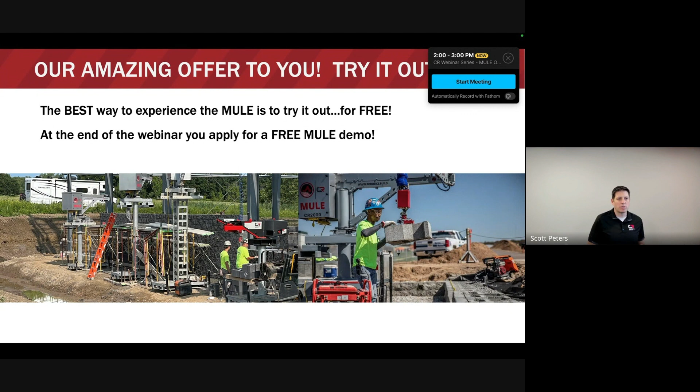So just to start high level about construction robotics and our core technology, it's really all about impacting some of the biggest challenges that you guys have out there in the construction world today, right? Labor shortages, we constantly hear about this, finding good labor, retaining good labor, it's always a challenge. Health and safety is definitely a problem. Injuries are very expensive and can continue to be a problem. And productivity, right? I think the industry trends speak for themselves.

Productivity isn't what it once was. You talk to people that have been in the industry for a lot of years, they'll tell you that productivity isn't what it used to be, and there's a lot of different reasons that are driving that. But at the end of the day, these are some of the biggest pain points that we continually hear from contractors out there. And one of the greatest things about the technology that the MULE brings to the table is that we can impact all of those. We impact the labor shortage, we impact health and safety, we impact productivity in a positive way for your business.

And it takes time to learn, it takes time to adopt, it takes time to really see the true fruits of those benefits. But we'll cover a lot of that today on how to accelerate that process and that learning curve.

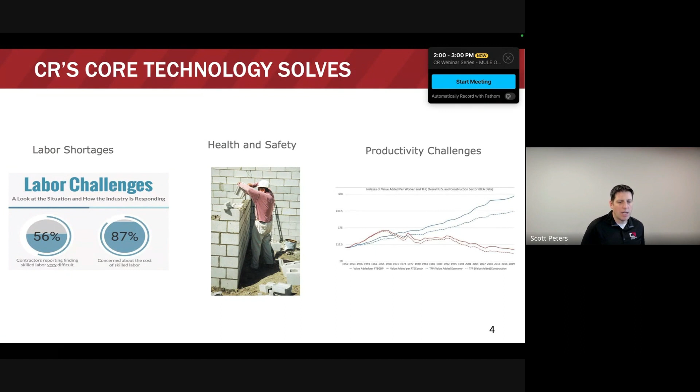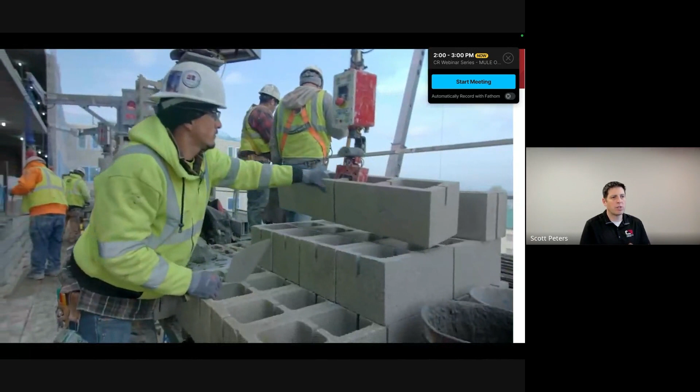So let's start with a quick video for those who haven't seen the MULE in action. We've got a ton of content on YouTube, a ton of different pictures and videos on our website, but this is the core of what the MULE is all about.

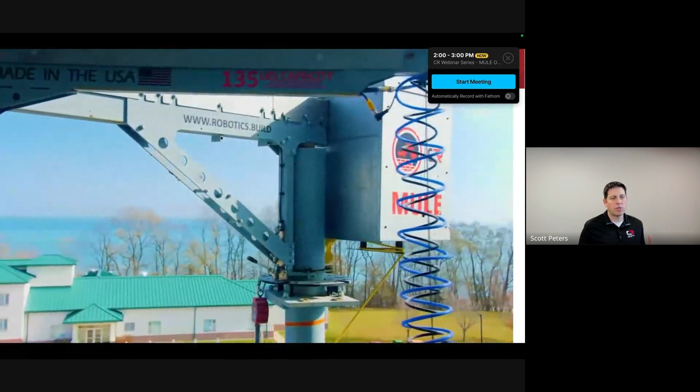We can make up to 150 pounds with the ML150, 100 pounds with the MZ100 weightless. So there's an 80-pound, 32-inch long block, and it just floats into place. So when you pick it, it floats. You can reach out, grab that material, zero strain on your body, your back and your shoulders.

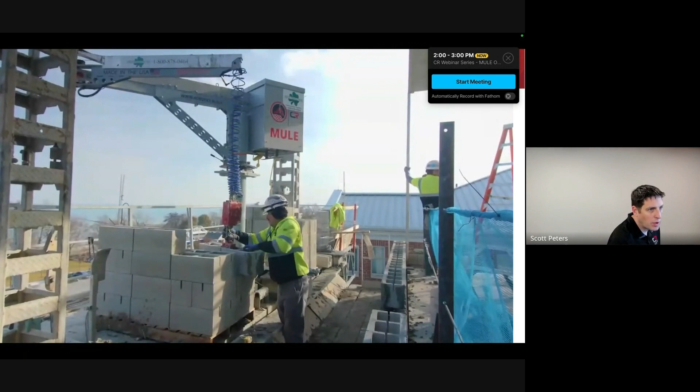So MULE stands for Material Unit Lift Enhancer, and it is a smart lift assist technology. It can make heavy objects feel weightless while allowing the worker to work directly with the material. We primarily lift masonry material today, but we can lift anything. So we can make any construction material feel weightless.

But again, primarily today it's block, brick. A lot of our off-the-shelf grippers are focused in that masonry industry, but we're lifting more and more products, and we'll talk about that in the gripper section.

Cranes and telehandlers and all sorts of things, lifting heavy materials. And now there's exoskeletons. There's a lot of great products out there to supplement back and body injuries and handle soft tissue injuries, things like that. But there's what we consider a little bit of a gap, and that's really, call it between 30 pounds and eventually 1,000.

Today we get up close to that 200-pound range, eventually higher. But in that range, these are things that when you're lifting them multiple times every day, you're creating injuries, you're creating problems. And the Mule makes that weightless.

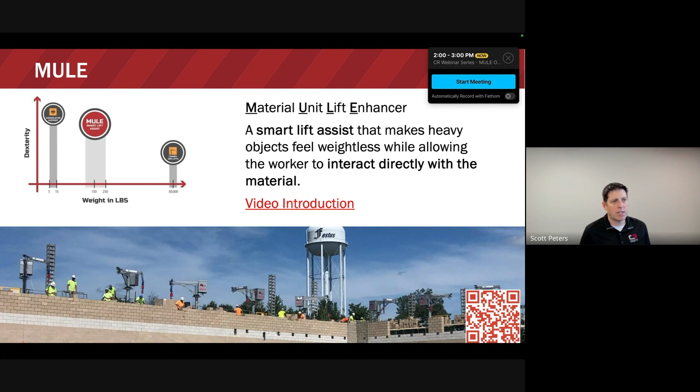It makes that process weightless, potentially takes a 2-man operation and makes it a 1-man operation, makes that material feel weightless. And so that's really the sweet spot of where the Mule technology, the smart lifting technology, fits with both our products today and more to come in the future.

I'll talk about some of the features of that product. And then we have the MZ100, and that's a product that launched just back in January. We've got quite a few of them out in the field, and getting super positive response as well. So really excited to have both products available, and we'll expand more on the different benefits, pros and cons of each of these products if you're evaluating which one might be the right fit for you.

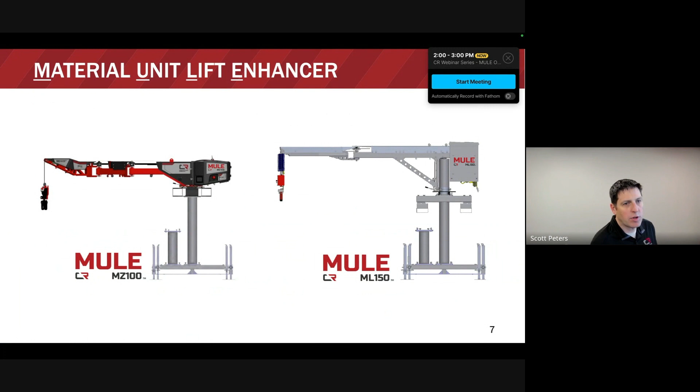So just really comparing the two, if you look at the left-hand side, the ML150 is really optimally used in outdoor applications. If you're lifting heavy materials, you're doing stone veneers, you're building block walls off the ground, off scaffold. I'll talk about different mobility setups, but if you don't have any overhead restrictions, that ML150 is a tried and true proven product, really excellent results with it. And one of the other really added benefits is flexible grippers.

So we have a higher lift capacity of 150 pounds with it, expandable up to about 180, 190 pounds with special software and special application analysis. We have off-the-shelf grippers, quite a few off-the-shelf grippers with that, you'll see that in one of the upcoming slides. And we can do custom grippers. They're also available, and even get into vacuum grippers.

So there's an air compressor on board with the ML150. It's a 110 plug, so it plugs into a generator, running off an inverter generator. That allows you to have access to pneumatic grippers, vacuum grippers, things like that.

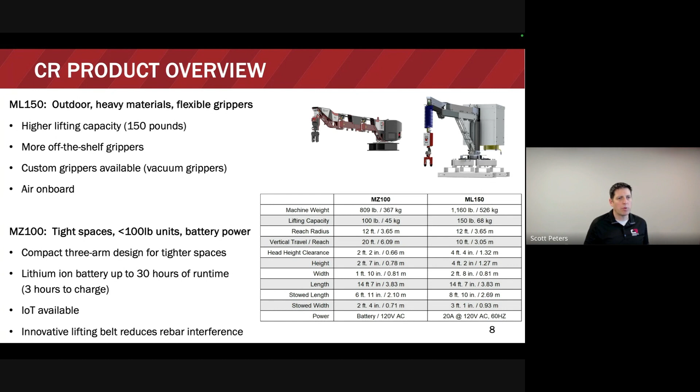One of the new pieces of technology integrated in this MZ100 is that we get real-time data on it. It's an option that's available on mules that you can opt up for. Then we have this innovative lifting belt, which reduces some of the rebar interference. On the ML150, we've got our air coil cord and data coil cord that come down to the controller. On the MZ100, we don't have that. We've eliminated that, which allows you to work in some of the tight rebar situations a little bit easier without interfering with those cables.

All right, so we'll spend a few minutes here talking about why the Mule, essentially getting into the ROI, the value, what this can do for your business, what this can do for your workforce. The benefits of smart lifting technology as a whole, we'll hit on 4 key areas. You've got workforce, which helps with labor challenges, extending careers and attracting new talent.

We spend a lot of time training the next generation workforce, going to different events, showing off the Mule, showing next generation workers that there are new technologies coming into the trade to hopefully help expand the pool of masons that are the future workforce. So it's not just the ex-linebackers out there, the big strong guys putting block in the wall, but it really opens up that workforce quite a bit, and that's been a huge win.

From an ergonomic standpoint, we eliminate the fatigue, the wear and tear, the injuries associated with repetitive heavy lifting. Masonry is a tough industry. It takes a toll on your body every day that you're out there lifting heavy materials day in and day out, and presents risk for injury. The ergonomics of the Mule obviously eliminates that.

And we've seen huge gains, huge benefits. I can tell you a lot of stories, but some of the most exciting stories for me personally are when we walk on a job site and talk to actual masons who have come up to us, shaken our hand, and thanked us, so appreciative of the technology. They wish they had it 20 years ago, but a lot of them talk about how they've been able to come out of retirement. They haven't laid block in quite a few years because they've been injured and could only be on brick jobs. When we hear those stories about people able to use their skill, the craftsmanship they've developed over the years to still have an impact in the industry, it's really exciting for us.

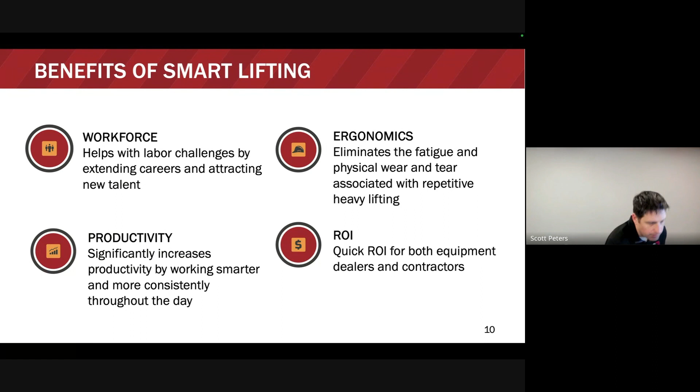So the other piece of value, there's kind of two sides of the value coin we'll touch on here. One is the hard costs—the things that can directly impact the bottom line on a project. Then you've got the soft costs, things that ultimately do cost you money, but you don't see them directly on a specific project. So the things that are hard costs that we directly impact...

The meat of the value you're going to get out of the Mule is really increased productivity. So we've seen productivity increases ranging from 20% up to—we've got a contractor doing over 300% increase in productivity. And it's not everybody, and it's not out of the gate. It takes a while to get to that level, but we will say it's possible.

So this equipment can absolutely pay for itself in relatively short order if you apply it in the right way. And a lot of what we talk about is how to do that.

Lower labor costs per block installed, the ability to install oversized materials. We'll touch on 32-inch block today and what a game changer that can be for you.

Schedule reduction, right? If you can put the same crew out there and reduce your schedule, or put a smaller crew out there and keep the same schedule, those are the types of things that will help you bid a project, utilize the Mule and the Mule method to actually save money on that project and get it done more efficiently, faster, or bid it more competitively.

And then reducing lightweight block budget, right? A lot of contractors we talk to pay a premium for lightweight block, and there are benefits to that because of the increased productivity and the impact on their body, the health and safety.

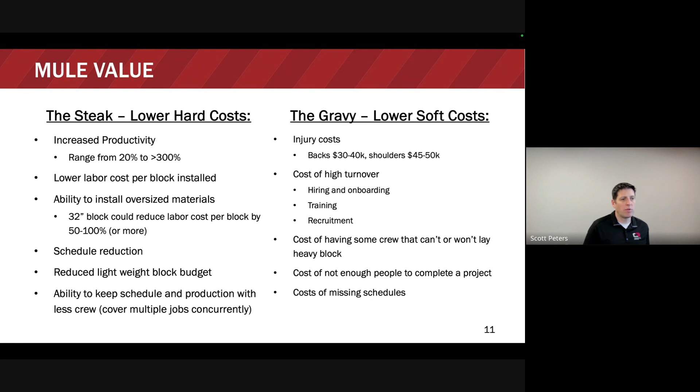And then the cost of just not enough people to compete or complete a project, or really missing schedules, right? Those costs are very real and impactful. So to prevent those, the Mule can help with all that.

So we're going to get into ROI for a couple minutes here and talk about it. We actually have a calculator online available if you're interested in doing an ROI analysis. If you go to our website, construction-robotics.com, under resources there's a drop down with an ROI spot. You can go to that website and play with the calculator. We'll be continuing to improve this, so we welcome feedback on it as time goes on.

If you look at just a 30% productivity gain on a job site—and obviously labor rates and productivity vary based on market—but as an example, if you have a labor cost per block of $5.76 with a 3 mason to 3 tender ratio, and you increase productivity 30%, there are really two factors that save costs: increased productivity from the health and safety impact and the ability to work continuously throughout longer days, and the ability to relook at your mason to tender ratio so you can pick block straight off the pallet, reducing double handling and freeing tenders for other work.

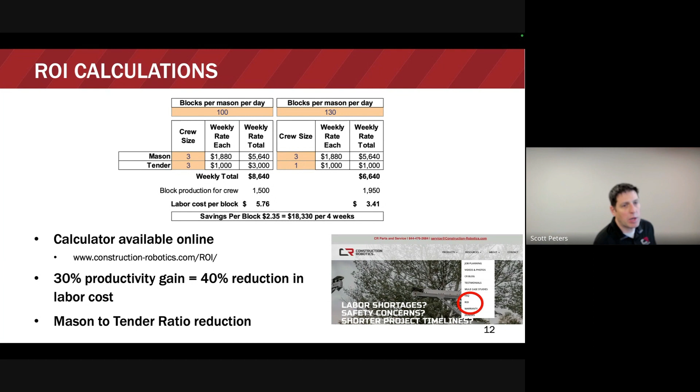When you reduce that double handling, it has a direct cost impact on your job. Savings in this case can be pretty significant over a 4-week period—you're improving your savings per block by about 40%. So the mason to tender ratio can have an impact, and productivity has a huge impact. We encourage you to play with the calculator and give us feedback.

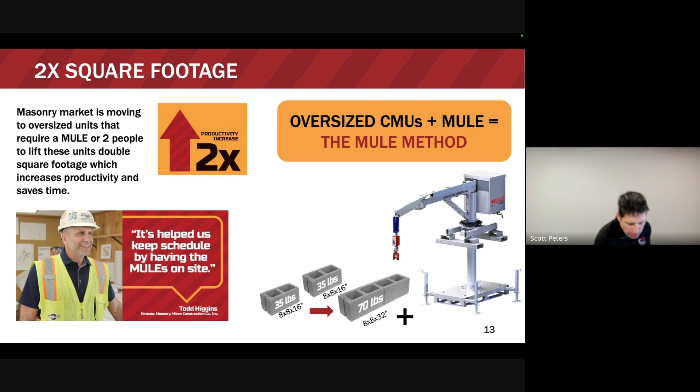The other piece of ROI that's really interesting is this 32-inch block story. Your standard 8/8/16s are prevalent—you probably lay a ton every day. But in many markets, and more are coming online every few months, 32-inch block is available. The idea of a double-long block is a game changer: you double your productivity with every motion to the wall. When you couple oversized CMU with the Mule, you get the Mule method, which, as Todd from Miron will talk about, helps with schedule, productivity, and across the board.

32-inch block is available in quite a few markets, with more coming online soon. We've seen great success in many markets, and this is a way for masonry to continue to compete, win back wall share, and grow as an industry. Once smart lifting tools are more prevalent on job sites, we need to ask what other ways we can optimize material designs and job sites to improve efficiency and productivity. It's exciting to see the continued support and collaboration with block manufacturers around the country embracing 8x32s, 10x32s, 12x32s, and other oversized materials.

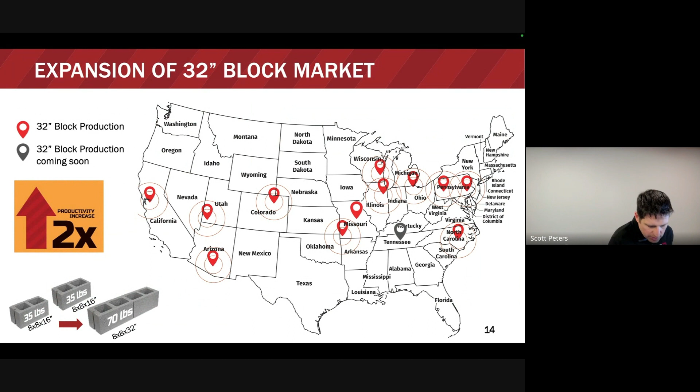When you look at the ROI of doubling your square footage with each motion of the wall, the ROI of 32s is fairly obvious, but let's walk through the basics. If you had 100 8/8/16s, you'd put 89 square feet in the wall a day; with 100 8/8/32s, you're putting 178 square feet in the wall in a day. Your labor cost goes from roughly $5.76 per block down to $2.21—cutting labor costs more than half. That equates to about $40,000 over a 4-week period of laying 32-inch CMU.

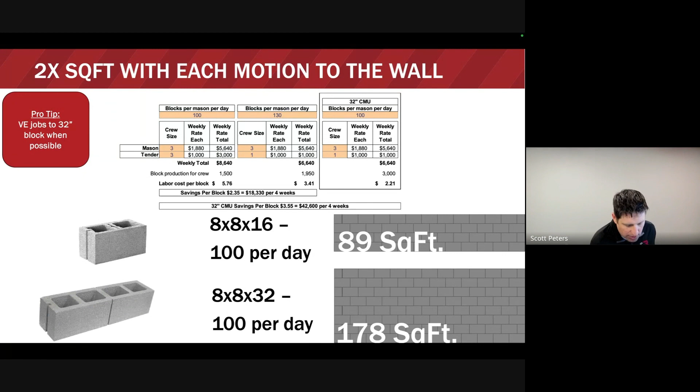We've seen a lot of jobs that get value-engineered to 32-inch block. It's great if an architect can specify it from the beginning—there's a beautiful long aspect ratio, and if you remove the score, there are some beautiful 32-inch block buildings. With the score, it can also be integrated with 16-inch block, no problem. We've seen many projects converted to 32-inch block well after design completion, going in with a change order to get it approved. We're happy to help facilitate or connect you with the right people to learn from that process.

All right, materials and grippers—we're going to run through a whole bunch of pictures and applications on the nuts and bolts of the Mule.

And then we'll talk about some of the learnings and how to be successful in getting going with the Mule, and what the next steps look like.

From a gripper standpoint, you have the ML150, a whole versatile range of grippers. We have a standard CMU gripper, and we have a modular gripper. The modular gripper works great for materials from really narrow, as narrow as an eighth of an inch, up to 18 inches long. If we needed to go bigger, it's very possible we could. So when you start picking different masonry materials, that modular gripper is incredibly flexible. We've got a whole huge library of materials sent from around the country, and we can pick basically all of them with the modular gripper in some fashion. So I challenge you, if you ever have material you think we can't pick, send it to us. We'll find a way to pick it.

And then the veneer gripper, our standard modular veneer gripper, is also available. Similar components to the modular gripper. The big difference is that we have a rubber pad on the cam on the front, and a finger on the back side that allows you to fit into a 1-inch cavity. Really nice, flexible product there. And then we have a hook that's pretty standard. You can just put the hook on there, put a sling, whatever you need to grab with that, no problem. We've even seen a vacuum gripper put on the bottom, battery powered, connected to the hook.

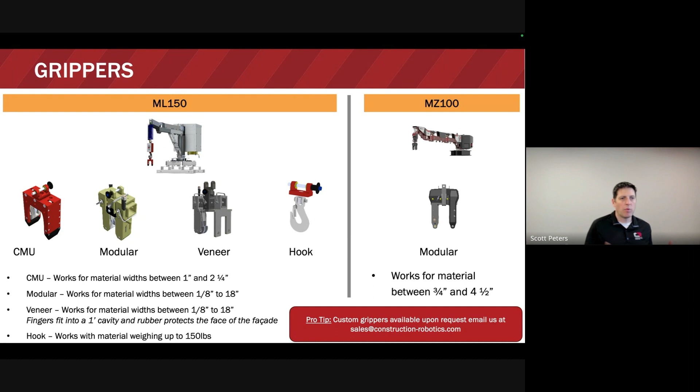The MZ100 was launched with a smaller modular gripper. It works for material between 3/4 of an inch and up to 4.5 inches. It can pick a veneer stone, though it doesn't have a veneer finger yet at this time, so you need enough cavity on the backside to pick that veneer stone, but in general it will work for that. And the pro tip here is that custom grippers are available upon request. Please reach out to us at sales@construction-robotics.com, submit through our website, and we can help you come up with a solution for picking whatever material you want.

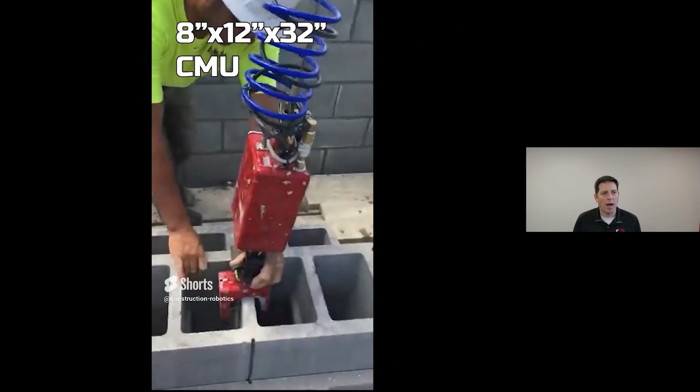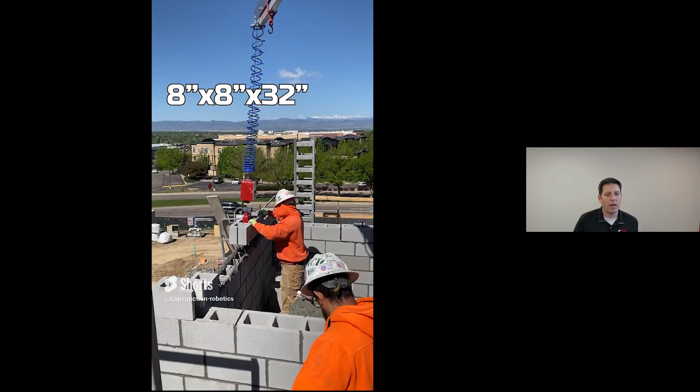So here's a great video showing all the different materials that we can pick with these different gripper options, whether it's a 1232, a 70-pound sound wall block, your bond beam blocks. There's really almost no materials that we can't pick with the grippers we have available, or even these custom grippers we talked about. So a lot of different versatile options.

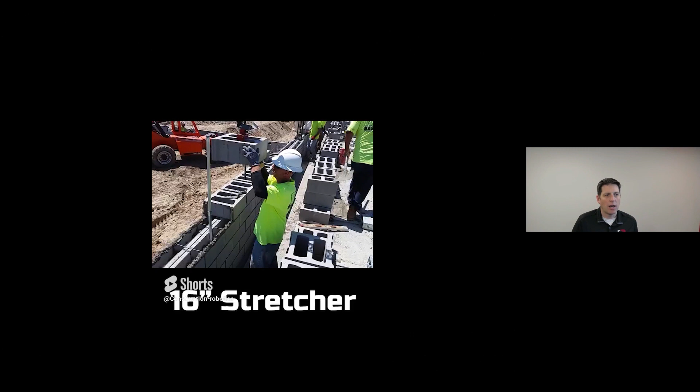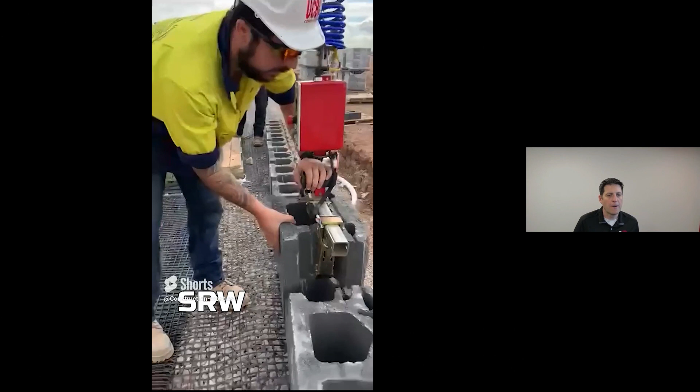There you go, coming up over rebar. We've got things like rebar extensions where needed, when you're laying those big 16-inch blocks, in these heavy rebar situations, and even SRWs. Great application for utilizing the Mule, with a modular gripper right there with the ML150, or even veneer stone. We've got some veneer stone grippers as well. So a lot of different gripper options. You can see more videos online and check out all of our accessories as well.

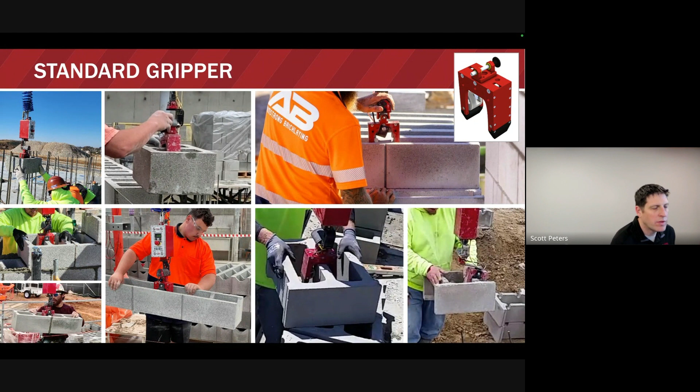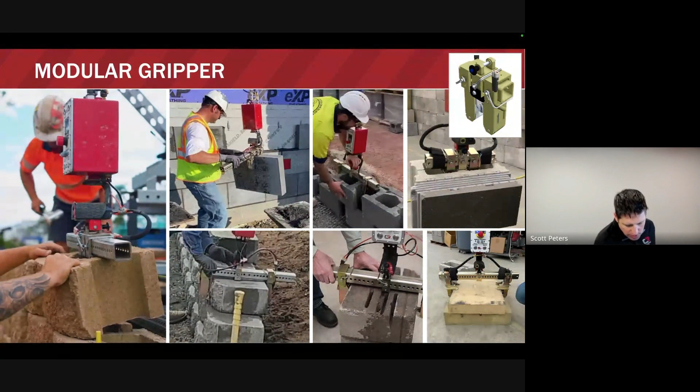Then the modular gripper, very flexible, adjustable to different widths. That modular gripper could be used to pick a veneer stone if needed, but also a lot of retaining wall, SRW block with weird webs, even large flat stones we've picked with that material. So again, very flexible, very versatile - it's a nice Swiss Army knife to have in the toolkit as you're picking different materials. And then the hook, shown on the left, and the veneer gripper on the right.

And the hook, you can see we've picked a lot of different things: pipes, cocoa bean bags, a lot of different materials. And on the right, you can see pictures of utilizing the veneer grippers to pick those stone panels.

When you go from a 2-man operation down to 1-man operation, it's incredible. One of the fun stories is a picture with a contractor talking about the material they're installing and just how much the mule helps them.

One of the interesting features they were highlighting was that as you go to the wall and try to fit that stone into place, if any adjustments are needed, you pull that stone back off the wall, make those tweaks and adjustments to tie it in, or shave off a little bit here and there to fit into a spot.

It was incredible to have that stone just float there—pull it off the wall a little bit, let it float in space while they made their adjustment, try it again, bring it back out, float, make the adjustments, try it again. That type of interaction without the mule is incredibly painful and time consuming. With the mule, it's super easy, super fast, and I think it's a game changer.

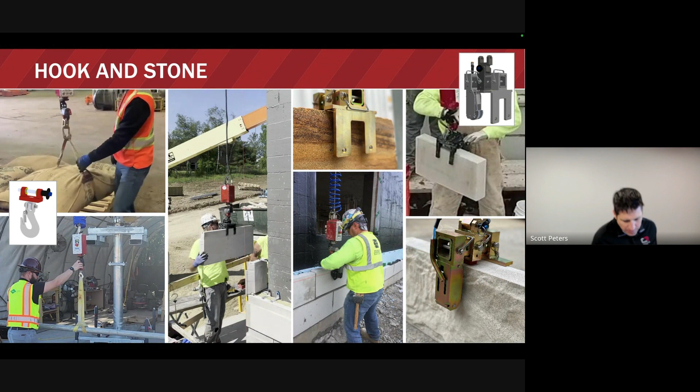All right, additional pictures of stone. We've got a great project going on right now up in Vermont. It's been featured in the news up there, with easy scaffold rail systems, mules, and installing these heavy 130-pound veneer stones. It's going great—the guys absolutely love it, and they're seeing phenomenal results there.

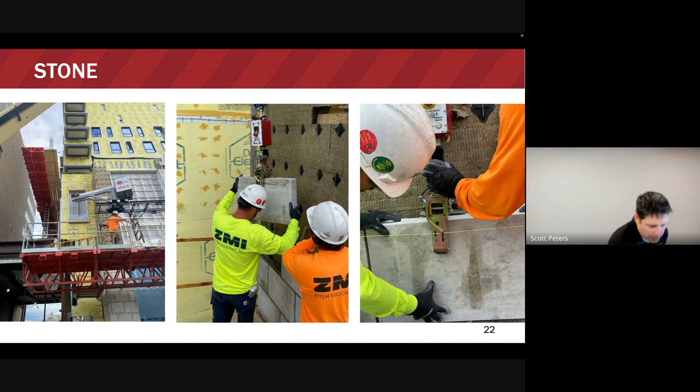All right, the bases—let's get into some of the bases here. One of the cool things about the two different mule products, the ML150 and the MZ100, is that we actually have universal bases across the board. I'll walk through each of these individually, but you've got your ground setups.

Up to 20 feet freestanding on our standard ground base that has 4 outriggers you can level up. You put masts on top of those outriggers. The masts come in 5-foot and 2.5-foot increments, and you can stack up to 20 feet of those on top of that ground base, with either the ML150 or the MZ100 mule on top.

We also reconfigure the fork pockets under the ML150 to be utilized for a mast climbing work platform deck attachment—you'll see more pictures of that next slide. We have a cart attachment, just a manual wheel cart that goes under the ground base. There are mast adapters available for certain mast climbing masts, so you can utilize those masts either to attach to the ground base or even to attach a mule to the top of the mast.

Scaffold has a rail system now available—we'll show you a few pictures of that. There's a TPX fork attachment; we partner with JLG, and there's a product now available that we sell and that can be available for rent, the TPX, or really the TF4000. That's a little stand-behind tracked forklift that we can actually operate the mule off of. You'll see a video of that at the end potentially.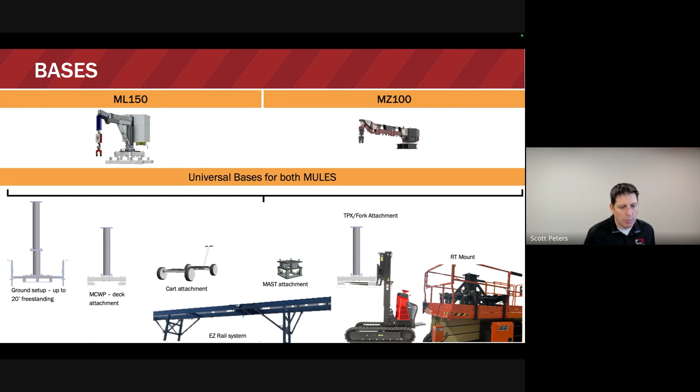And then we have an RT mount. We've recently been approved by JLG with their 3394 RT scissor lift, a rough terrain scissor lift that goes 33 feet in the air. They have actual mounts available for rent or purchase that can be mounted right to that RT. You can rent or buy those RTs and quickly extend in the air, operate your mule from the other side of the wall from your scaffold, lower it down, move it over in a matter of minutes, and get it reset up. So if you're using frame scaffolding or want to load your scaffold with materials and don't want the weight of the mule on those scaffoldings, up to that 33-foot mark, that RT becomes a very, very real, very viable mobile option we highly encourage you to take a look at.

All right, so ground setups. The basic ground setups—in the upper left, you've got some freestanding setups. The standard package that comes with a mule is 7.5 feet of mast and a ground base, and either the MZ or the ML arm. In that case, very easy to set up and operate off the ground. In the lower left, you can see a few different mast setups there.

They've got 7.5 feet of mast in one, 10 feet of mast in the other. They actually have a hydromobile mast adapter in another with 10 feet of mast, and then the MZ on a ground setup. So you can see lots of different flexible options as you look at the parts and pieces that are fairly interchangeable on job sites. And with freestanding, you can integrate it right into your frame and build the frames around it if needed.

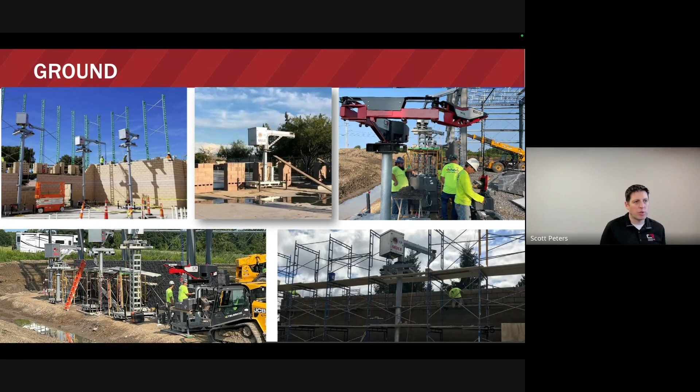With some of the ground setups, you can see some other applications there. Very easy to pick and move with a telehandler. Just pick it with the fork pockets up top, move it to where you want to go, set it down, level it up, and you're off to the races.

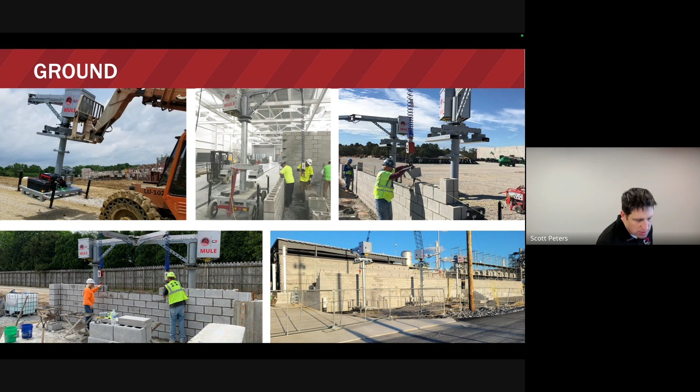We have a wheelbase, and we've also operated them on trailers. That wheelbase is great if you're interior on a concrete floor — you set up your mat, set up your wheelbase, and easily drag that mule around where you want, put your outriggers down, operate it, very quick and easy to just crank the outriggers up and slide it down. With the wheelbase, you are limited to a certain height — you can't go full 20 feet. We're working on the details of that, but if you have an application question, feel free to reach out to us. We can work through that with you.

We've had contractors that have even utilized the mule on trailers themselves — put your material on the trailer, put your mule on the trailer, put your material right on the trailer, and pull it down the wall. In the case where you're doing long site walls or SRW walls, or a long run, that mobility can be a huge advantage. That's a great way to look at doing those projects.

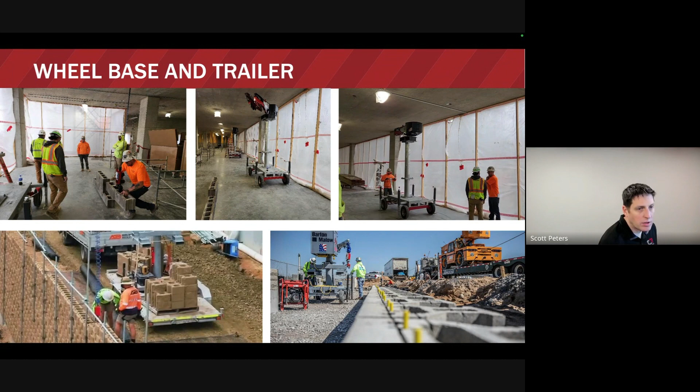All right, mast climbers. We mount to both the decks as well as the mast of most mast climbers, and we work with all the manufacturers out there. So reach out to us for more information — we're happy to collaborate with any mast climber manufacturer to find a solution that works best for you.

You can see in the center, a standard deck mount for us is to have the fork pockets on the ground. There's an adapter plate on top, and deck straps that clamp right into the fork pockets. You have a mast on top of the adapter plate, and then the mule, whether it's an MZ or ML. You can operate with 5 feet of mast, or 7.5 feet of mast — there's a few different options there.

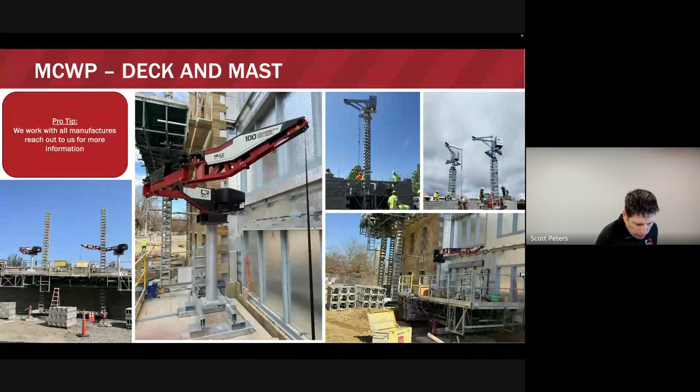We also can mount to the mast, and in the upper right-hand corner you can see a couple of mast mounting options. If you want to get the mules up high and out of your way, you can mount them to the top of the mast. There's some pros and cons to those setups. The best bet is to work with us to do a job analysis to figure out what makes the most sense. Certain applications it's great to use it on the mast; other applications can present challenges, and there's other ways we'd approach it. Definitely work with us, and we can help you come up with the best game plan.

I'll quickly run through a handful of examples of different mast climbers with mules. Here's some hydromobile pictures — when you put a mule up on a hydromobile, if it's deck mounted, you typically want to space them roughly 20 feet apart, so a mule every 20 feet. The arm itself is a 12-foot arm on either the MZ or the ML. With that 12-foot arm, you space it a little ways away from the wall, giving you about 20 feet of workable space per mule — great for the setup and workflow on that scaffold.

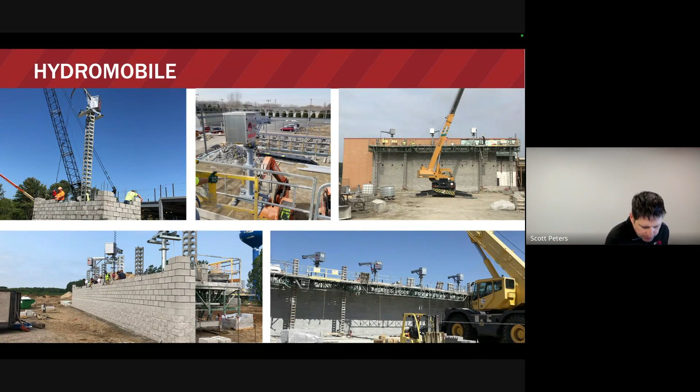Some more hydromobile pictures. Here's some great stair tower pictures where they're actually able to utilize the mules on the inside of the stair tower off of a mast climber, and then wrap the outside of the stair tower to load men and materials. A whole bunch of advantages with that method, but there's a lot of pros and cons, and we'll probably do a separate webinar with information on how to effectively operate on stair towers as well.

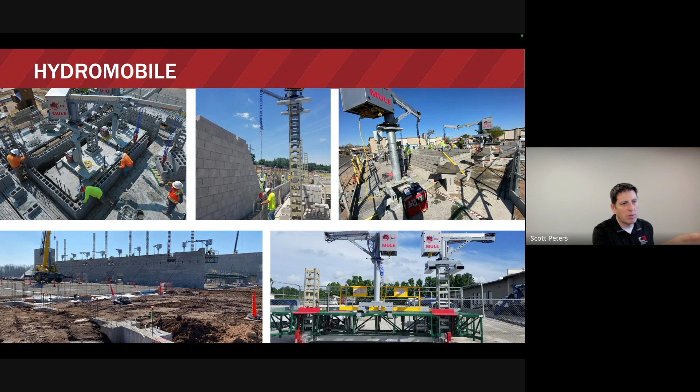And so then you can also see in the lower right, kind of your standard deck mount in the middle, and then the mast mount on the right.

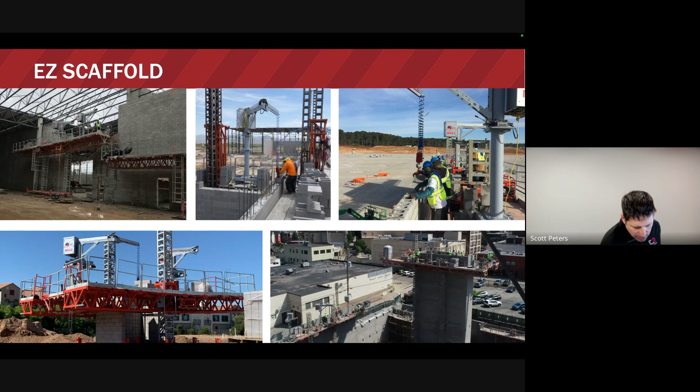All right, EZ Scaffold. We also work with EZ Scaffold. Again, they can do similar deck mounting options. You also can put the ground base up on really any mast climber as well. The difference is that the ground base is about 600 to 1,000 pounds heavier than the fork pocket setup. So if weight is not a big issue, you can just put the ground base right up on the scaffold, but it is bigger and takes up more weight. The nice thing about the fork pockets and the deck straps is it is a little bit more compact, and mounts directly to the actual scaffold itself.

And again, with EZ Scaffold, it can mount either to the mast or the decks.

EZ Scaffold has also come out with a rail system. If you have questions on this, you can reach out to us or EZ Scaffold directly. They have a rail system now available where your mules can mount on that rail system and travel quite a bit further. So a single mule that would normally take up 20 feet of wall, you could put a 20-foot rail on there, and that mule is now picking up an additional 20 feet. So you're at roughly 40 feet per setup.

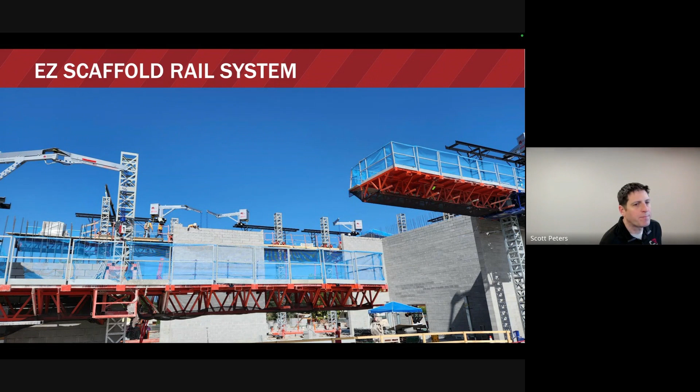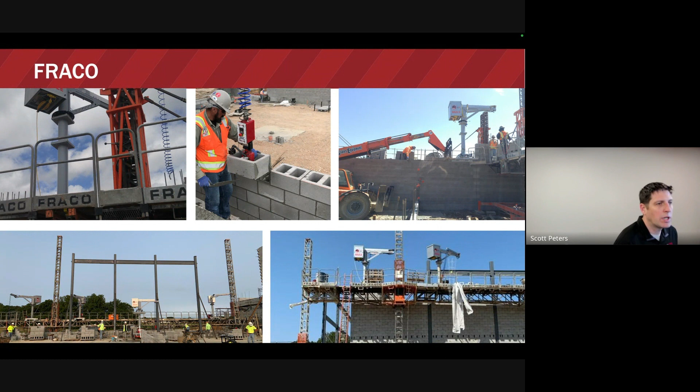Crank up, we've worked on different crank up systems as well. EZ does have a rail system available for their crank up also.

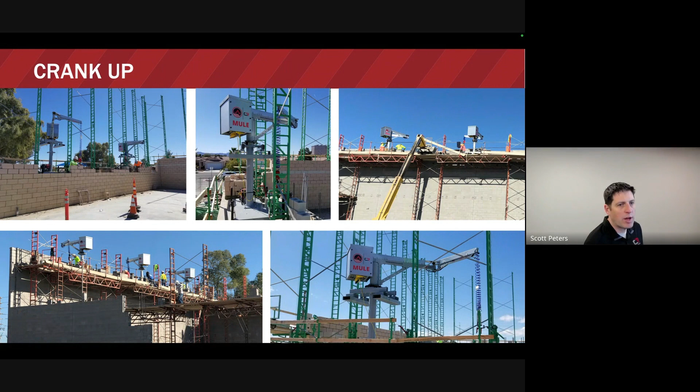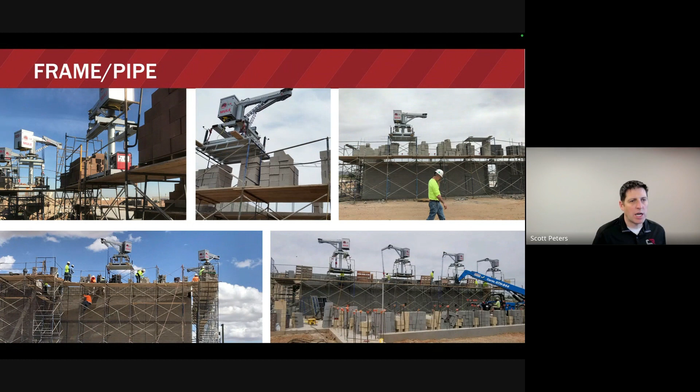And then we've operated on frame and pipe scaffolding. In this case, this does require some special engineering and approvals, but we've had customers that have used the mules right on the frame and pipe scaffolding. There's other options for utilizing the mules around frame and pipe, whether it's from an RT, whether it's freestanding from the ground, lots of different options that we could talk through the pros and cons, but this is another scenario if needed, or if it's something that's desirable.

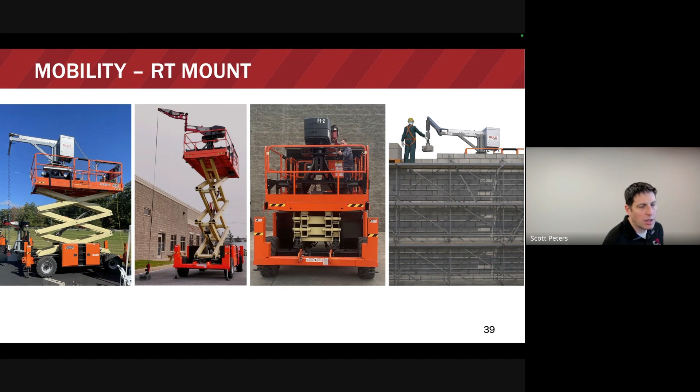I talked a little bit about the mobility RT mount. Here's a few pictures of it. So there is actually a mounting device that sets right in the basket, clamps right on and locks in. Fairly easy to install. The mule mounts right to that. That whole unit can be picked out with a telehandler or a sling to be brought out. But in the case where you maybe have access to both sides of the wall, frame scaffolding on one side, putting the mule on the RT on the other side allows you flexibility and immense portability that's really exciting to see out there.

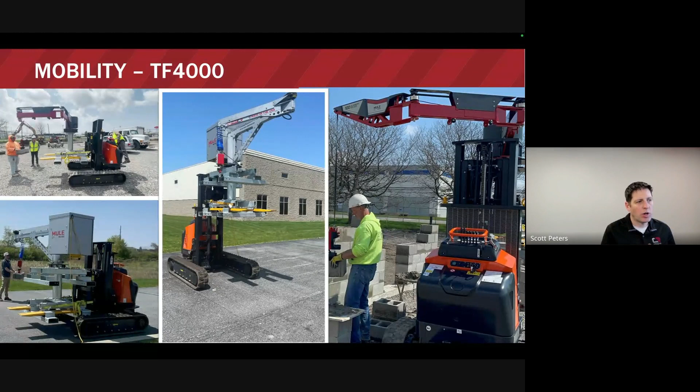And then we have the TF4000 available, which is a little track loader that can operate the mule straight off that. You can pull up to a job site, drive off the trailer, drive up to the wall, and you're laying block in a matter of minutes. Great for site walls. That'll only get you about 8 to 10 feet high off the ground, but again, great for low work and great for a lot of movements.

Okay, so those are some of the basic pictures. We're going to spend about 10 minutes here getting into some of the right job and some of the tips and tricks, and then try to leave it open for questions along the way here. If you do have questions, feel free to throw it into the Q&A if you can, and we'll try to answer them. So what does the right job look like?

We hear a lot that, hey, I'm interested in the technology, I'll try it out when I get the right job. And so the real question is, are there good and bad mule jobs? I mean, the reality is that there are, but we have been on all types of jobs.

We can oftentimes guide you and advise you on expectations. The mule can work on all jobs, but there are certain jobs where maybe it's not worth it—maybe the material is too light or the spaces are too tight. But there are immense opportunities as we develop more accessories and products. The right job for the mule is typically over 40 pounds, where you get larger productivity gains out of the gate with heavier materials. The wrong types of jobs are very tight work, very light materials, and attitude is a huge piece.

So what's the number one factor in mule success? It really is attitude. We've seen teams be incredibly successful with the mule, using it in places we didn't even think would be possible. They pushed the envelope and were able to do that because they saw the benefit from a health and safety standpoint.

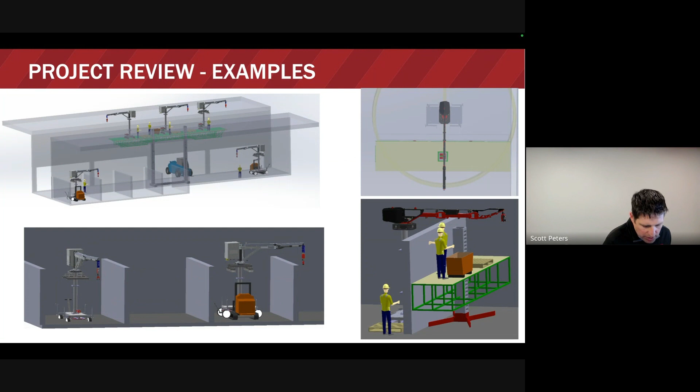So the pro tip here: send us your drawing, send us your scaffold plan. If you send us models, we can actually create models that overlay and apply to them. That applies whether you're renting or buying—we're happy to work with you on the game planning. This is an example of actual project reviews we've done, where we looked at the walls, the setups, the scaffold, and determined the actual locations of the mules—what made the most sense for the scaffold, what made the most sense for the mule, and how we would recommend approaching it.

Here's another example where we not only put the mules up on the scaffold, determine the optimal hydromobile setup for this job, what the right length of scaffold would be to optimize where the mules go, as well as determine whether the mules should be biased towards the front or the back of the scaffold. We even started to lay out things like flat plank versus drop plank, general placement of the mule, general placement of the block, and what the material flow looks like. All sorts of things like that are a big piece of what we try to walk through in that job planning process.

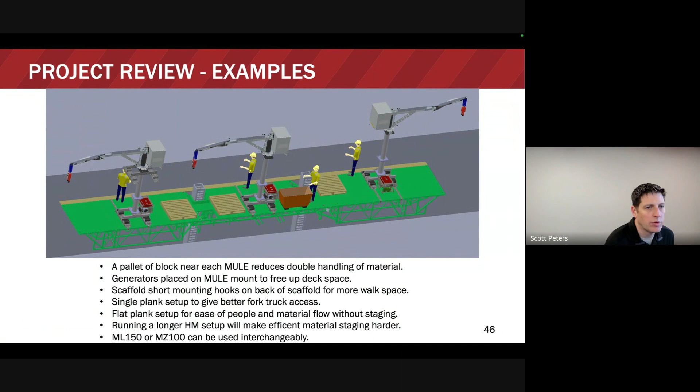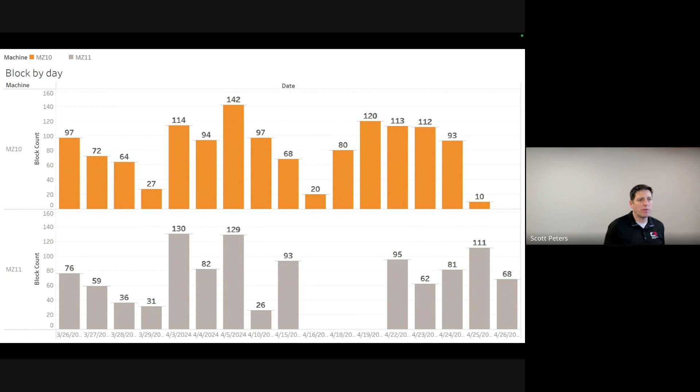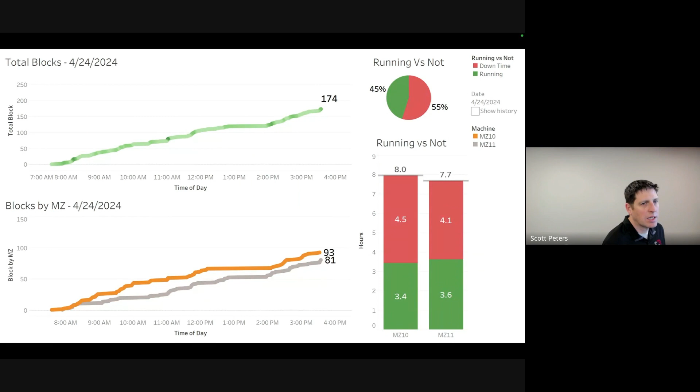The MZ100 also comes with an exciting feature, which is really your data analytics. We actually get real-time productivity data on job sites, like how many blocks you install every day depending on which MZ you've got out there. We can see trends over time, uptime, downtime, and things like that, which can help you with planning and understanding what kind of results you can get on job sites.

All right, we're going to try to wrap it up here in the next couple of slides. Again, we'll open it up for questions, but changing would be hard. We know it can be hard. It doesn't have to be. There are really, call it 5 steps for adopting the MULE, so let's talk through what some of the next steps look like if you are interested in giving it a try.

First step, identify a project. Target one with block, stone, or material that weighs over 40 pounds. Plan your project, work with our customer success team, work with your dealers, plan out the project, work with your scaffold manufacturers. Understand the 3 M's of your masonry success: your manpower, how many men you're going to put at it and where they're going to go, your mason to labor ratio, where the machines are going to go, your scaffold plan, your mule plan, as well as your material flow.

So where the block pallets are going to go, how to pick off the pallets, how to reduce the double handling of your materials. Then run your ROI, looking at rental, finance, and purchase options, evaluating your 32-inch block pricing, and accessories that you need for that project. Run your ROI - we can help you with that.

And then training. We highly encourage hands-on training with our teams and with your dealers, to really understand and get full buy-in from your team, and get everyone comfortable with what this is going to do and why it's there to help save their backs and bodies. And then follow up - that continuous education, the buy-in is critical. Pushing through those early challenges of adoption will pay off. That second, third job will be better than the first. So stick with it is really the big thing.

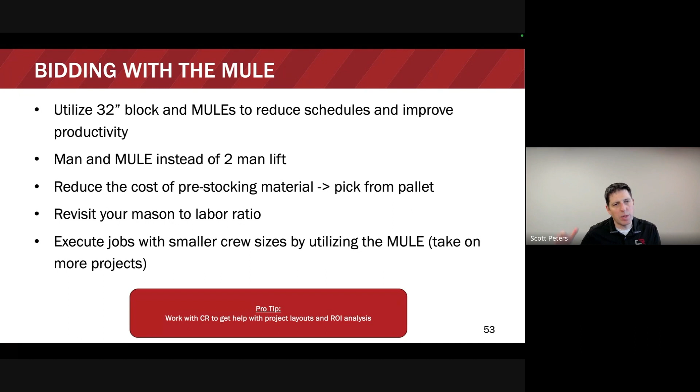So work with us, pro tip, work with us to help with project layouts and ROI analysis. And ultimately, as you learn, you'll be able to apply those into your bidding process going forward.

So what does success look like from day one? Managing expectations, being clear of what success looks like for you and your team. Understanding it may take a few projects to really hit your stride with this technology, but to accelerate that learning curve, the little things that do trip you up, and a lot of things we talked about here, I think are the tips we've heard and can provide to be on the lookout for. Those are the pitfalls and obstacles to avoid.

And then we're here to help. Remember, the mule can really make the material weightless, but it's your team that increases productivity. They're doing that through great planning, logistics, and execution. Just like you rely on your team to be great at that planning, logistics, and execution, and that's how you make a living, the reality is that it's no different with a mule. It's just a new tool that can assist the worker.

So really identify, support, and embrace the mule masters, those champions. Identify that champion within your team who can learn the ins and outs of the mule, just like you would if you adopt a mass climber or a new technology. You're going to want to identify somebody that can really sink their teeth into this technology, become that champion, learn the ins and outs, and then spread that throughout your team.

And then avoiding the pitfalls. Don't hesitate to call us or your local dealer and invest in training, more training, and just continue to learn. We'll try to push more content out there. We welcome feedback. If you've got things you want us to provide more information on, we're happy to do that. We know there's a learning curve, and we want to help streamline that process.

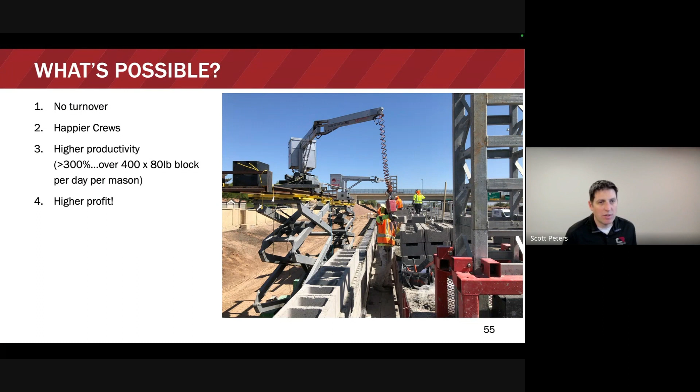But as you continue to work at it, optimizing your crews, layouts, and game plans—we have a contractor who talked to us late last year about using mules for quite a few years. He said some things happened he never thought would: no turnover in his crew, happier crews than ever, massively higher productivity, over 400 block a day, and more profit than ever. These are things that are very real and achievable if you stick with it and embrace what this technology will do for your backs and bodies.

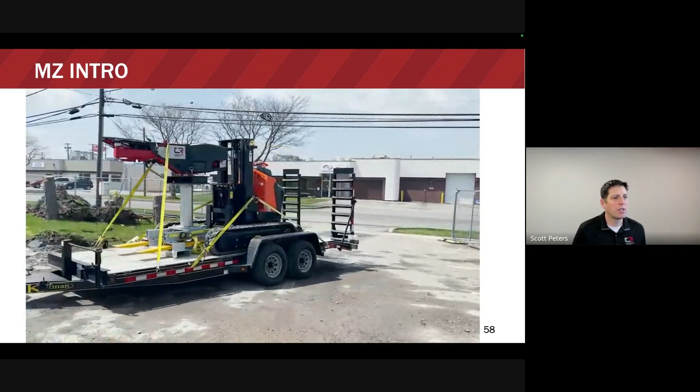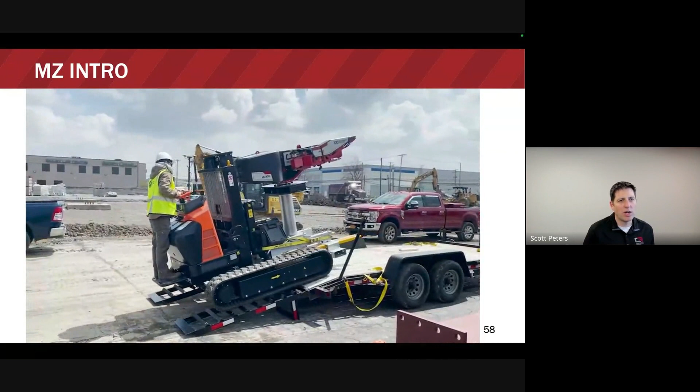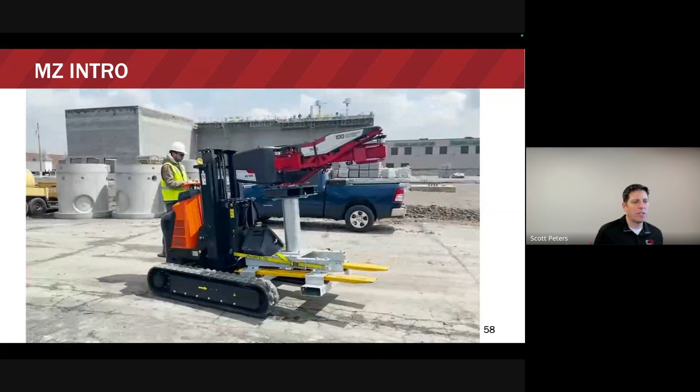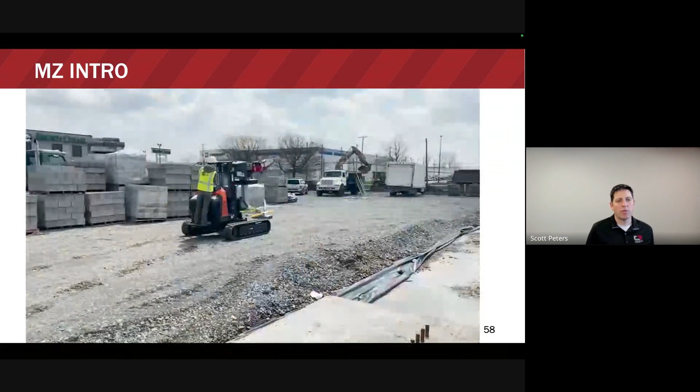So this is just a quick video as we close out—see if any questions come in to address. This is the TF4000 with the MZ100 on it. You can see it shows up to a job site, drives off the trailer, raises it in the air, and can be laying block fairly quickly. This type of innovation continues to come out as we partner with manufacturers like JLG to integrate our smart lifting technology into products like theirs. I think these things make the mule more accessible for smaller projects, quicker setups, and quicker applications—it becomes a lot more setups.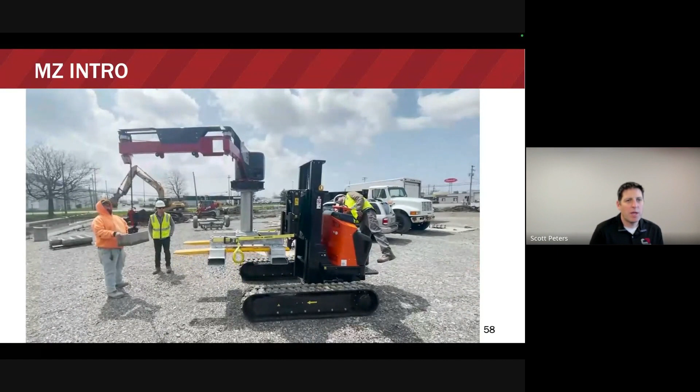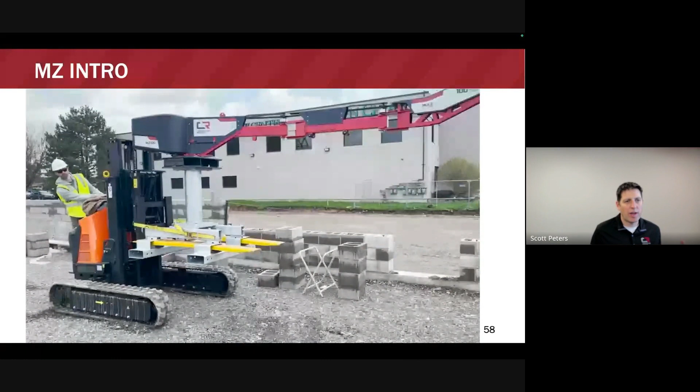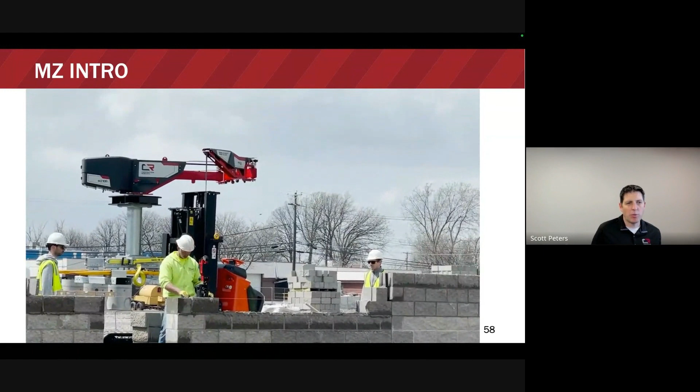One question that came in: how quickly can we do a free demo? Free demos can be arranged fairly quickly—applying is the best way. Tell us the dates you're looking for. We do have a handful of mules available for demos, but they get booked up, so it depends. There is a limited time frame on the free demo, but we'll try to be as responsive as possible to meet your need. So apply—we can turn those around fairly quick.

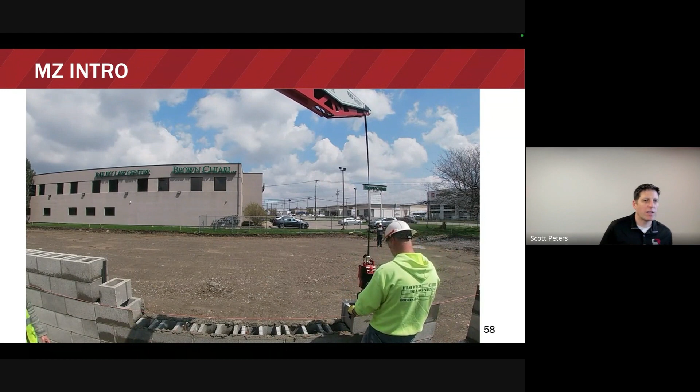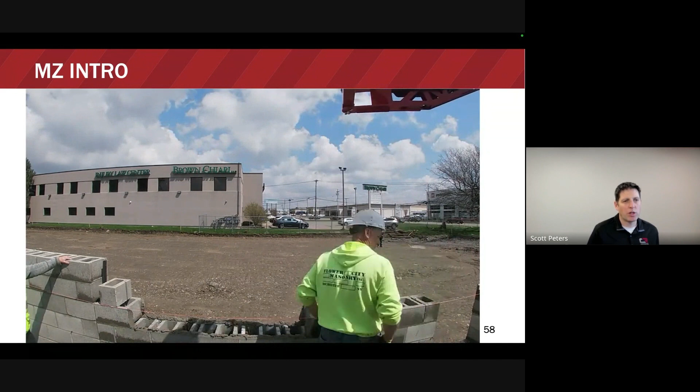Lead times on new mules, MLs and MZs, are roughly 6 to 8 weeks. We try to respond a little bit faster—we have dealers that have them in inventory, so if you're renting mules, you can usually get them turned around pretty quickly, and sometimes even purchasing, depending on your market. That's roughly what it looks like. Our best advice is if you're looking at mules for a project in the future, try to plan 6 to 8 weeks in advance if you can. But if you can't, give us a call and we'll see what we can do to help satisfy what you're looking for.